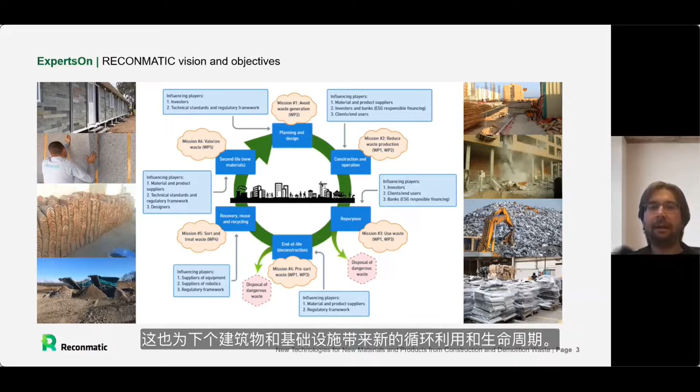But what we are looking for, and what is the mission of Reconmatic, is to seek new solutions and new technologies, even in combination with some automation processes and robotics, to sort better and to treat better the waste materials, so you can finally valorize the waste material and create a new circle with a higher and better economic and technical added value of the material which was once used in the building, and can again go into a new cycle and a new life for the next structure, building, or infrastructure.

This is also the reason why we think we can effectively integrate different parts of the digital or automation solutions we have now existing on the market, starting with building information modeling, where defining and incorporating better data and information we have about a building can help, from the stage of designing until the stage of operation, to understand what kind of materials and properties of the materials we have, and how we have to deal with these materials or construction products through the whole life cycle.

Similarly, if you are speaking about artificial intelligence, blockchain, Internet of Things, etc., these are parts of the automation or digital solutions which can be transferred to some new applications, which simply can help to optimize or reduce the waste at the end which is going to landfills.

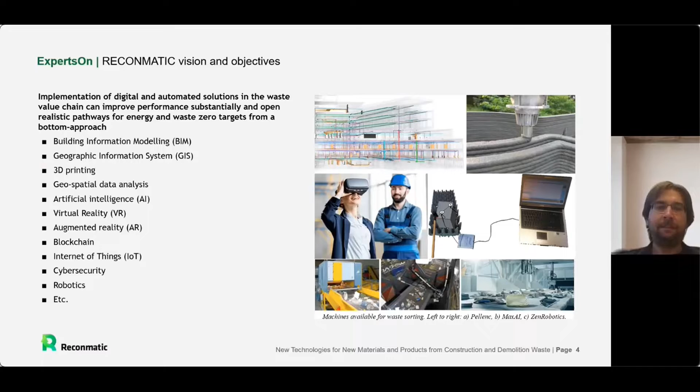Just as an example, with artificial intelligence, if we train the equipment, especially with machine learning solutions, we can probably better sort the mixed construction or demolition waste, so that we are getting material streams which are less contaminated. And then, of course, if you have a less contaminated material, you can create much better new technical solutions for how this material can be produced.

For blockchain or Internet of Things, as another example, if we use these techniques, we can probably, during construction or operation of buildings, create solutions where, just by better organization and better understanding among different stakeholders of how information is shared and how demands and requests are defined, we can avoid an excessive amount of waste being created. That's one of the examples we will definitely develop within Reconmatic as one part of our strategy.

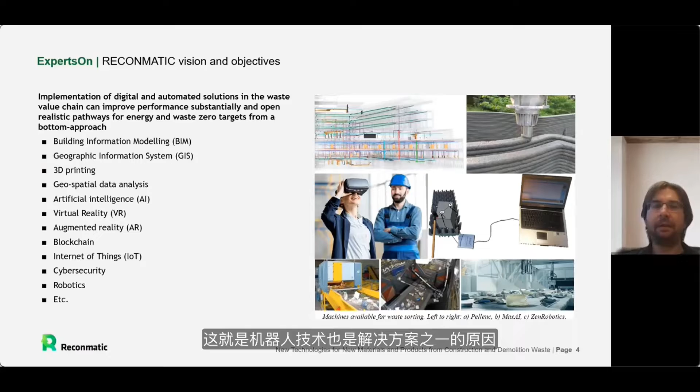I already mentioned that we are following six different missions. We define the missions by what we can do with the waste. We can avoid the waste. That's especially when we are planning our buildings or starting to construct them, simply by doing the planning or the designs a bit differently. For example, understanding life cycle assessments and integrating life cycle assessments of materials into regular decision processes shall help the designers and the investors make the right choices and avoid excessive waste being created just because of unoptimized design of the building.

Then we have the minimization of waste, which is often related to the process of construction, where we can seek techniques or technologies, for example, when you're constructing gypsum board partition walls, planning before starting the placement of these boards so that instead of having 30% waste from cutting the boards, you reach maybe only 10% or even 0% of such waste.

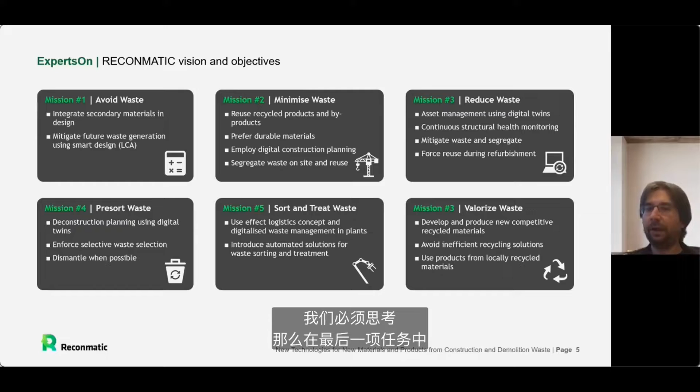to get the particular streams of materials like ceramics, glass, plastics, wood, etc., so that later on in the last mission we are able to better valorize these waste streams, meaning that we are not simply just looking at downcycling, which we are able to do always, similarly to the incineration of many of the waste streams, but we are more focusing on getting some efficient solutions of reuse and recycling, so that the added value of the waste material is higher than just what I have been mentioning with downcycling.

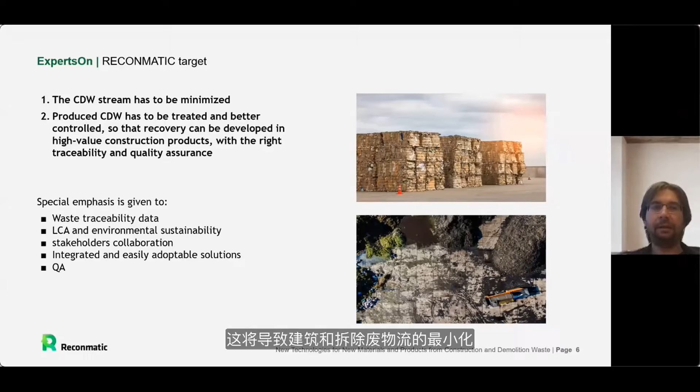The target in this respect of Reconmatic is very simple: to have procedures, methodologies, and demonstrate some of the solutions which will lead to minimization of the construction demolition waste streams. And on the other hand, to have a clear line which will guide us to solutions which will provide us new products, or products of materials and parts of the structures and buildings which will have a higher value, without the fear that there will be some limited quality issues, or there would be some reduced bearing capacity of these materials.

In this respect, what we definitely are looking for is the way how we can better get or provide a traceability of data which are related to the waste streams which we have on a building or a structure. Then, of course, which is very important, is to integrate really as an integral part of each structural material or construction product the sustainability aspects and the LCAs, so that we are not only understanding as civil engineers the structures in terms of technical parameters, but we are starting much more to reflect also the environmental sustainability.

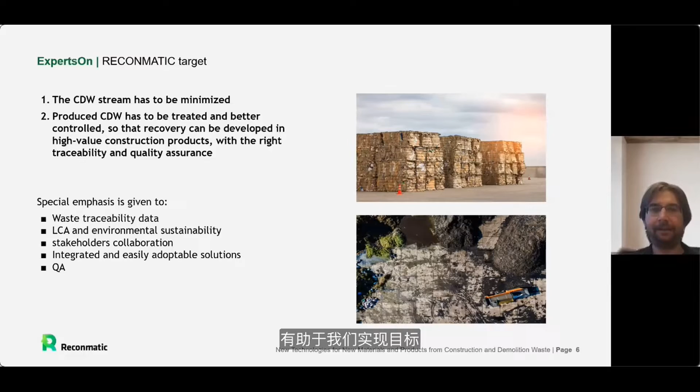This all will work only if we are able to get some better and more effective collaboration of different stakeholders. And it is still believed, and it's not only the belief of the Reconmatic team, that building information management or modeling is one of the strong solutions how we can reach this. Reconmatic is organized in, let's say, six different tasks. I try to simplify it a little bit with this slide.

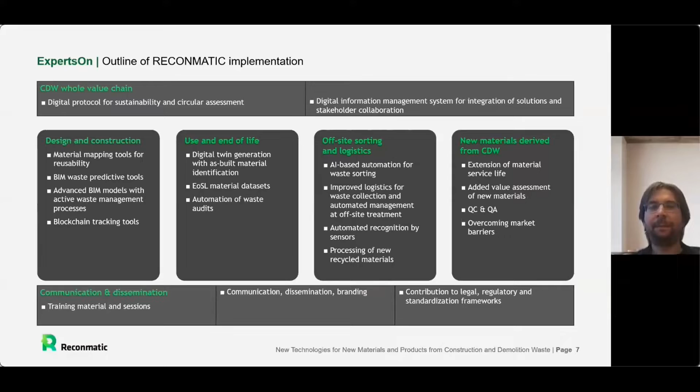We have, let's say, two horizontal tasks or work packages, which will on one hand support the communication and dissemination, including some education of the new solutions we are going to develop, and on the other hand the work package which is covered by understanding the whole value chain of construction demolition waste, where we are looking at delivering a digital information management system which will merge all these stakeholders together, will support the collaboration, and will provide waste data from the very beginning until the stage of the valorization of waste materials and waste streams.

And then we are following, as already has been presented in the previous picture with the circle, the stages of the life cycle of a building. We are focused on the particular stages, and bring together design and construction, where we are looking for some material mapping and a prediction of waste being integrated in the regular BIM tools and BIM solutions we already have, and at the same time the blockchain tracking tool, which we will start maybe with concrete, since concrete is one of the most important materials. So we believe it makes sense to have some solution and some demonstration for this type of material.

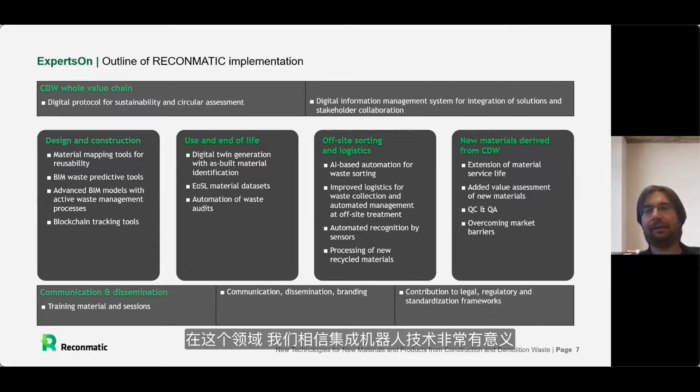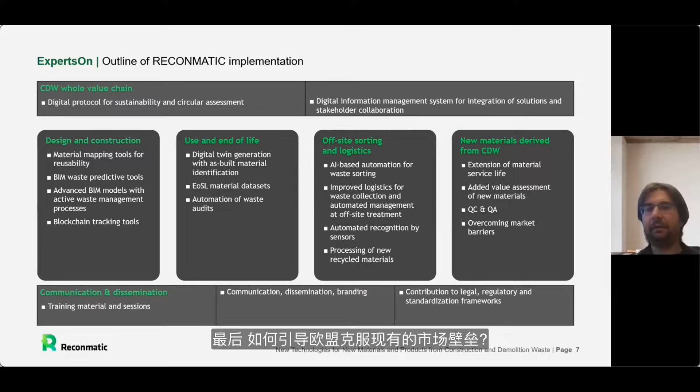Finally, new materials which can be derived from construction and demolition waste is the last vertical work package, where we have defined some of the material or waste streams we will focus on. We will deal with some quality assurance and quality control mechanisms, how we can digitalize this, including the digitalization of some pre-demolition audits, etc. And finally, how to guide the European Union in overcoming the existing market barriers.

This is just for your information. What are the partners involved in the whole project? You can see that in total we have 23 partners. In Europe, we are planning to have 6 demonstration cases, so a real demonstration of the new solutions. That's what was even asked by the European Commission. You can see the countries which are involved, so the coordination being in the heart of Europe, and then we are more or less covering different parts of Europe with UK, Spain, Italy, Greece, and Cyprus.

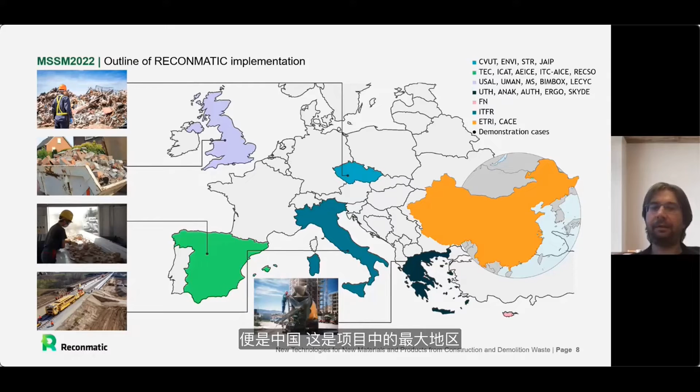And the area which is on the other side of the globe, where you are now listening to my presentation, is the People's Republic of China, which is the last region involved in this project.

The outcomes and impacts we hope to reach. The first outcome is to simply get and introduce new knowledge in reusing, dismantling, and better valorization of construction demolition waste. We have set some KPIs, increasing by 50% the reusability of construction products by the solutions we will deliver.

There should also be some advice and recommendations to the European Commission on new or updated standards which will be needed, especially if you are then combining, let's say, the technical aspects and the aspects of environmental sustainability. This will simply lead to the need for new or advanced standards.

And we will even create some education tools and materials. There will be some training for different stakeholders, or let's say activities like train your trainers, so that we are not only delivering the solutions and the new innovations, but we are also preparing how these solutions can be effectively used by the industry and by society.